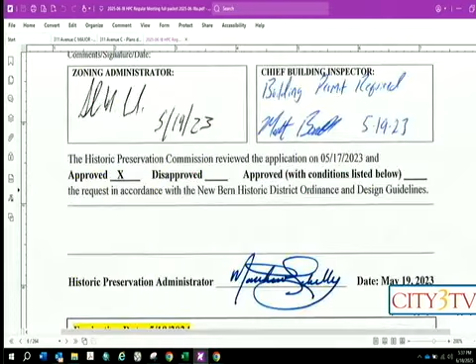We'll look over the application as filled out with regard to description, guidelines and materials, and then on the second page, the relevant check boxes and the signature and date of the applicant. So this is, I'm going to make this a little smaller, it seems to be going too fast.

This is in effect a reapproval of, or re-review of, a previously approved project that has not been changed in any way, other than the applicant's address and the signature on the bottom of the application.

So just to give you an idea what the COA entailed, there were no conditions at the time, and it was even extended for one year, but then after that one year it lapsed, and so now they're looking for reapproval. So the application at the time included this information here.

Showing similar historic district examples. The project is a new garage in the backyard of their property. We'll see that in a minute.

They provided some old Sanborn maps and delineated the work area for where this garage will go. There's currently a rusty shed in the corner of the property that they would like to remove in order to put in the garage. The site is at the corner of Avenue A and North Craven Street, with the driveway coming off North Craven Street.

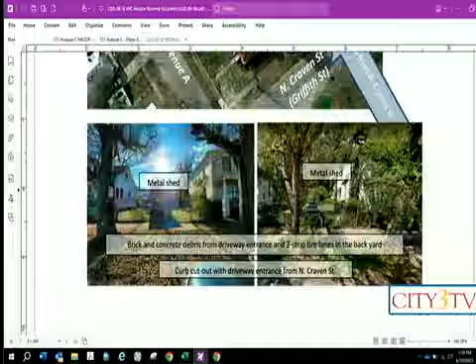So they have some photographs of the site here on the left, where you can see, especially in the winter, the metal shed, and in the summer with some of the leaves and stuff on the trees. But they're also pointing out the two strip tire lanes in the backyard, and a curb cut's already there.

So here they finally show the site and the proposed garage location in the blue dashed line here. And the white dashed line is the same as from before, delineating their backyard. In this case, Craven Street's on the top right, and Avenue A is the lower right.

So here's the beginning of the drawings. It shows in the upper right the front elevation of the garage, two doors, two lights, and a window for the attic space there. And then on the left side, it's a blank wall.

I'm sorry, I guess that's the right side. And then the back wall has also another window in the attic, and then the southeast side facing the house has the doorway on the right and two small windows on the left, and also another exterior light.

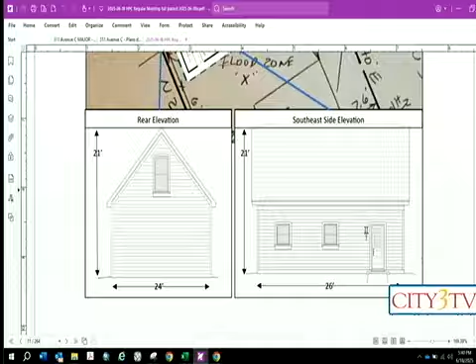They provided all the appropriate, or spelled out all the appropriate guidelines. We'll zoom through those.

Okay, so then we'd be ready for the zoning and inspections review. The zoning administrator indicated that a zoning permit would be required for the project, and it seems to meet the requirements of the land use ordinance.

The chief building inspector indicated that it will require a building permit. Building and floodplain permits are required. So then, when you're ready, I'm ready with the staff report.

Okay, is the applicant or their representative would like to comment?

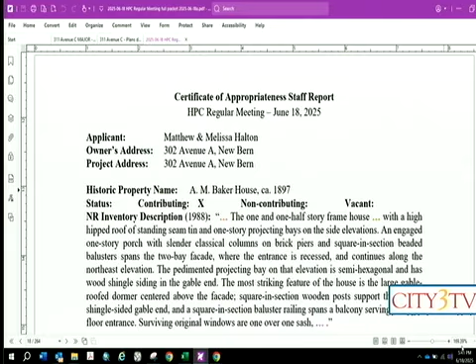Okay. Thank you. Thank you, sir.

Are there any proponents or opponents of the project that have standing who would like to present evidence? Seeing none. Others who can justify that they have relevant information and wish to speak to the project? Seeing none. We'll have your recommendations.

All right, so this is a staff report for the project at 302 Avenue A. The historic property name is the A.M. Baker House, and it was built around 1897. It is a contributing building in the historic district.

And the National Register inventory description from 1988, the relevant portions of it are: the one and a half story frame house with a high hipped roof of standing seam tin and one-story projecting bays on the side elevations. An engaged one-story porch with slender classical columns on brick piers and square in section beaded balusters spans the two-bay facade where the entrance is recessed and continues along the northeast elevation.

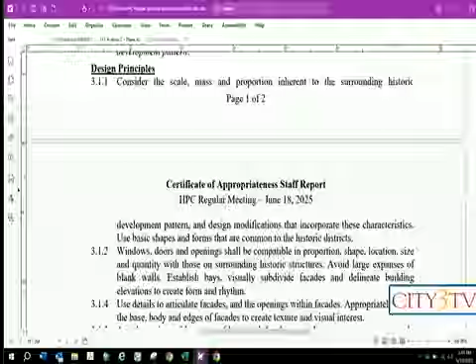So we submit the following historic district guidelines as appropriate to this application: for utilities, 2.3.1, 2, and 3; for fences and garden walls, 2.5.6; for accessory structures, 2.6.1 and 2; for parking, 2.7.1 and 2; for design principles, 3.1.1, 2, 4, and 5; for walls, trim, and ornamentation, 4.2.4 and 5; for windows, doors, and openings, 4.3.2; for paint, 5.4.2, 3, and 4; and for contemporary materials, 5.5.6.

Statements of reason based on the information contained in the application, in staff's judgment, are: 1, the structure is a contributing resource in the tight weave development pattern; 2, the project is an accessory structure within the secondary and tertiary AVCs; 3, the proposed design components and materials meet the requirements of the guidelines; 4, the zoning administrator and the chief building official have reviewed this project and commented accordingly; and 5, the project is not incongruous with the guidelines.

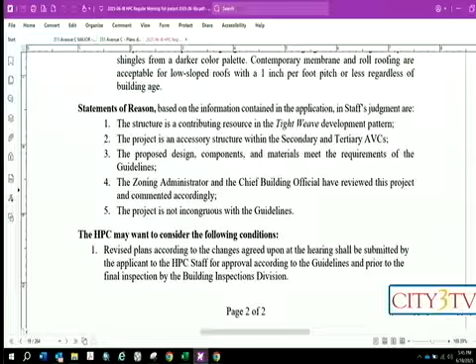The HPC may want to consider the following conditions. The only one I have listed here: revised plans according to the changes agreed upon at the hearing shall be submitted by the applicant to the HPC staff for approval according to the guidelines and prior to the final inspection by the Building Inspections Division. And that's our staff report.

Okay, thank you. Discussion, questions? We've approved this before because it certainly meets, it's certainly consistent with other garage types that we've approved in the past. As far as I know, there are no planning or zoning ordinance changes or guideline changes that conflict with what we approved before. It certainly meets guidelines 2.6.1 and 2.6.2 concerning secondary structures or accessory structures being secondary to the primary structures.

So I think this certainly still meets the guidelines. I'd agree, and I had a quick question for Matthew. We talked about this in design review, but thank you for adding those notes. I think that came out of our discussion. But for the record, other than those notes, are there any changes of substance to your application as it was reviewed before? No, there were none. Thank you.

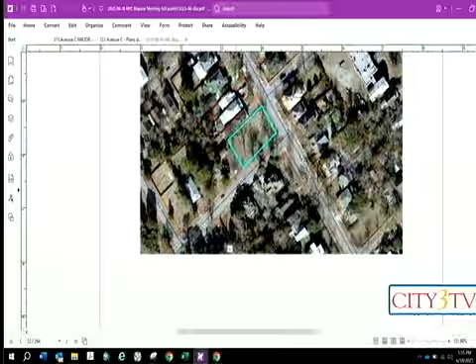And if you have any questions about the other - I'm sorry, there is more context, sorry to belabor this - but B Street is also part of the context for this project. Immediately behind, there's essentially a vacant, almost vacant lot with basically an accessory structure in the back. Then the next one is a house on a somewhat wider lot, as is the other two on that same block. The next house, you can see here in plan view, is quite a bit farther apart. Those, however, are not in the historic district. The historic district boundary is right here, after the edge of the vacant lot.

Then on the other side of B Street, already mentioned the one on the corner. Then the next few going up the street are somewhat smaller lots and smaller houses, somewhat closer together and closer to the street in this particular case. So, all right, next we can then see some of that more close up if we need to.

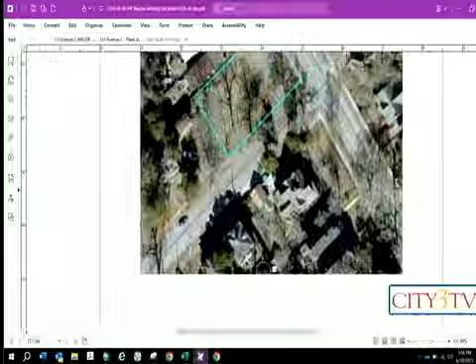So some of the existing photographs, at least from 2012, is what Street View had available for us, and it hasn't changed much. We have basically a large vacant lot with a couple of trees, some larger and some smaller.

As we move down National Avenue, you have a better idea of what some of these plants look like, but also the proximity to the neighbor. Back along the other side, you can see the neighbor's house and broadside in the back.

And the streetscape area there, and then if you go to the back corner, the southwest corner of the property, looking back across the property here. This tree, by the way, has since been removed recently by the city. It's no longer there.

Now moving up north on National Avenue, the neighbors' houses are shown here for context. You can see in the aerial view they were set quite a ways back from the sidewalk, and you can see that here even more so.

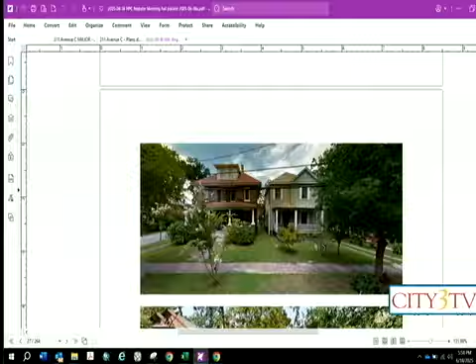So then across the street on National Avenue, these houses give you an idea of what those houses are like. Then as you cross Avenue B, continuing south on National Avenue, these are the houses directly across the street from the property, these two.

Plus then the ones on National Avenue, south of the property, but on the west side. This is the house on the corner back in 2012, no longer looking like that today. And then the two other houses to the south of that. So those give you some ideas of the context.

This is along National Avenue. Now this is going up B Street on the south side. That is the house on the corner with its garage, which happens to be pushed up right against the sidewalk. And then the next two houses up that same side. These are the other two.

These two are not in the historic district. And then across the street from those two on B Street are the other two houses on the block, on the same side as the subject property. And then finally, this is a view of the partially vacant lot with the accessory building in the back, and the subject property on the right.

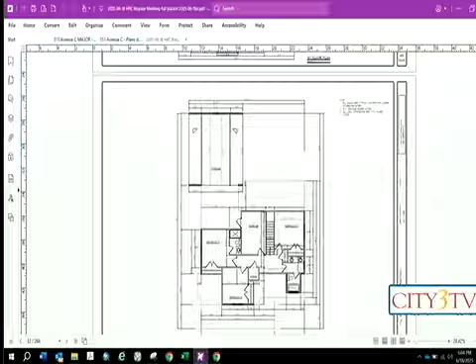Second floor, not much here. We'll notice that a lot of this is handled with dormers and sloping roofs. Probably not talking much about that.

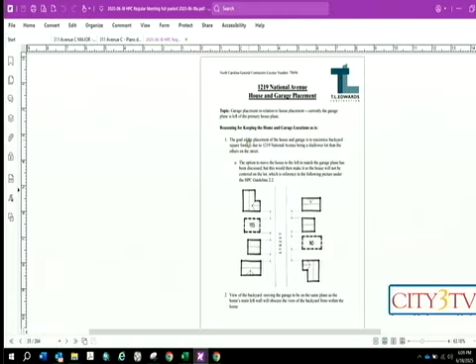Now, at the design review meeting, you asked the applicants to prepare something about trying to allow them to have the garage located where they had proposed in that meeting. So they provided this document here. I have to go over it with you because no one has had a chance to look at it since it arrived this morning or late in the morning today. So I'm going to go over this.

So the topic is garage placement in relation to house placement. Currently, the garage plane is left of the primary house plane when you look at it from the front. Reasoning for keeping the home and garage location as is: the goal of the placement of the house and garage is to maximize backyard square footage, due to 1219 National Avenue being a shallower lot than the others on the street.

Bullet 1: the option to move the house to the left to match the garage plane has been discussed, but this would then make it so the house will not be centered on the lot, which is referenced in the following picture under the HPC Guideline 2.2.

I have included the email that I replied to them with regard to this presentation. So we'll just go over this first and then go over my email reply.

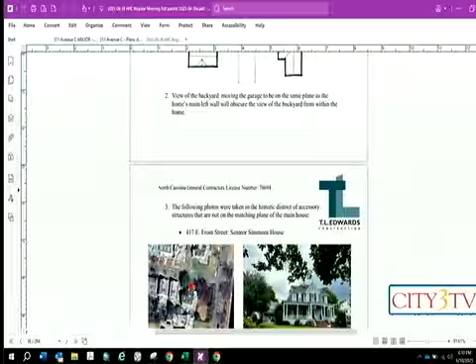View of the backyard: moving the garage to be on the same plane as the home's main left wall will obscure the view of the backyard from within the home. Their living room actually has windows looking out onto that back porch on the south side, very close to the back corner of the garage. If we want to look at the plan, we can look at that later.

The following photos were taken in the historic district of accessory structures that are not on the matching plane of the main house. I think they misunderstood that we required it to be on plane with it, but they've shown various homes that are not indeed on plane with the face of the building, but set back, and of course we know that's okay.

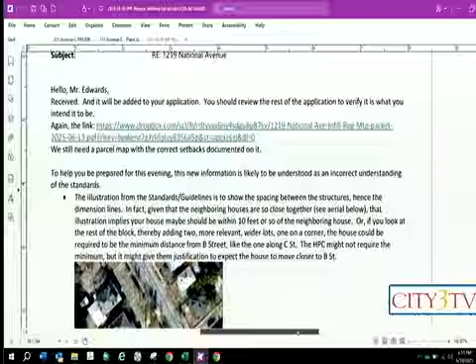So for my reply, I indicated—I should make this bigger now—the first bullet here: the illustration from the standards and guidelines is to show the spacing between the structures, hence the dimension lines.

In fact, given that the neighboring houses are so close together, see the aerial view below, that illustration implies your house should be within 10 feet or so of the neighboring house. Or if you look at the rest of the block, thereby adding two more relevant wider lots, one on a corner, the house could be required to be the minimum distance from B Street, like the one along C Street. The HPC might not require the minimum, but it might give them justification to expect the house to move close to B Street.

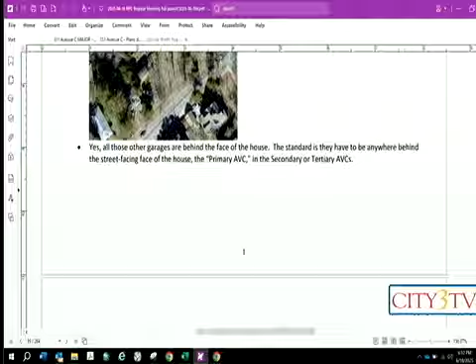And then the second bullet was regarding the other photos that they provided. Yes, all those other garages are behind the face of the house. The standard is they have to be anywhere behind the street-facing face of the house, the primary AVC, or in the secondary or tertiary AVCs.

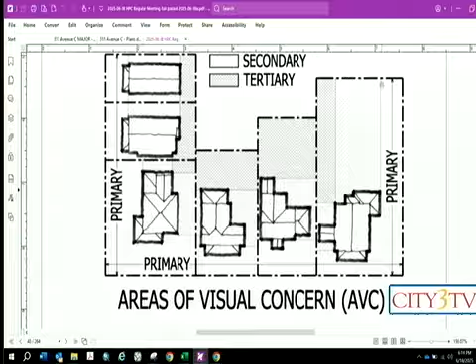So, for example, on this lower left property, the section inside the primary is actually the open front porch, supposedly. Same with this one on this corner here—the one facing down towards the bottom is an open front porch, whereas apparently the illustration here indicates an addition which has an enclosed space on this side, and therefore the primary is extended from the face of that wall. Or at least that's the way we all understand it. So there are options to address when we want to address that.

Before you move on, Matt, can you go back to your first bullet? What do you mean, back to what? Your first bullet on your response. This one here? Mm-hmm. Yes.

Okay. All right, moving on.

They've also subsequently provided, since the design review meeting, a landscape plan, so hopefully you've had a chance to review these. I see they're essentially planting around the building here. I pointed out that the air conditioning cannot be along the B Street facade of the building, so I'm thinking they may have an alternate in mind for that.

All right, so you probably remember from the meeting, they also provided a series of slides on the materials for the project, and they updated those according to some of the comments that were made.

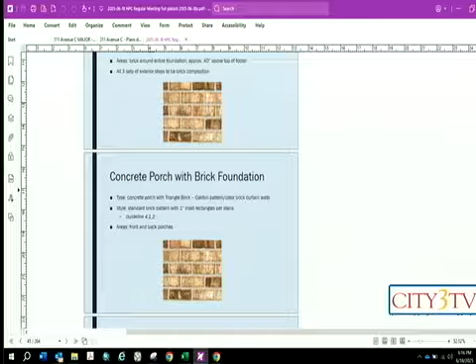So, for example, here we have brick veneer and steps, and then the concrete porch with a brick foundation, the siding—and in this case they've indicated the style is 7 1/4 inch boards with a 6 inch reveal and a smooth finish.

The boxing and trim is also Hardie board, smooth finish throughout, and we're talking about the areas of the rakes, eaves, beams, fascia, corner, and window and door trim. Trim dimensions are referenced in the plans.

Porch ceilings are standard pine bead board, for both the front and back porch ceilings.

The handrails are treated pine, painted white. Pickets are to be centered on the handrail with no more than 3 inch distance between each picket, which is guideline 4.4, and that's for the front and back porch.

The columns are brick and AZEK, with dimensions given in the plans for the front porch columns. The brick is the same as the other brick throughout the house, and the AZEK is to be white.

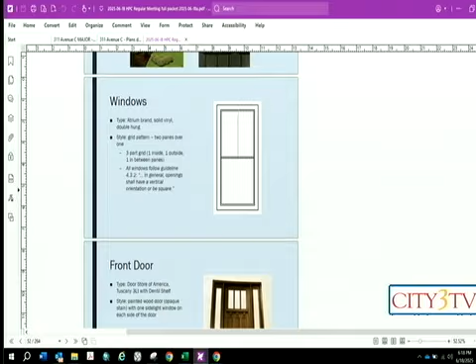For the windows, they are solid vinyl double hung, 2 panes over 1, and they have the 3-part grid with 1 inside, 1 outside, and 1 between the panes.

For the front door, primarily it'll be a painted wood door with opaque stain, with 1 sidelight window on each side of the door.

The back door is a fiberglass door, paint grade, and it's a full glass door with a transom window above it.

The door to the breezeway is also a fiberglass door, full glass, and painted.

The garage doors are 2 painted aluminum insulated doors, carriage house style, and the panel style shown is not necessarily indicative of the final selection. It's what they could probably Photoshop in there.

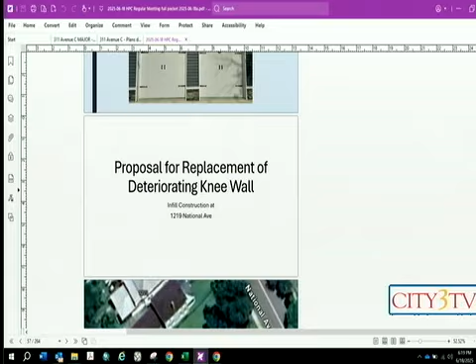They also provided a proposal for the replacement of the knee wall along the property line with their neighbor to the north. The knee wall runs the length of the property between the 2 properties, and these are some photos that we saw the last time.

It's not a retaining wall, has no structural significance or footers. It's unstable and deteriorating, interferes with placement of fence and landscaping, detracts from the appearance of the property, and grading of the property may impact its integrity. So they're proposing for fencing.

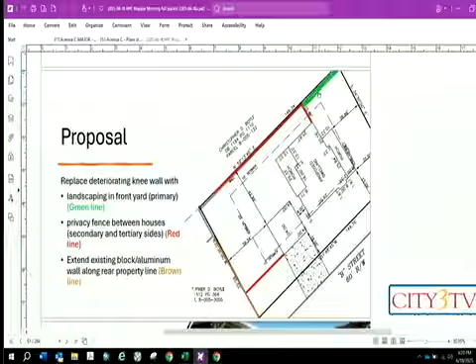I'm not going to make this bigger, the lettering has gotten smaller, and we need to see the colors here. The lines in green up in the upper left and upper right are a line of landscaping that they're proposing.

Then at the front face of the house, they will be coming out with a privacy fence across to the boundary, and then back to an existing masonry wall that's back there, coming close to the corner of the property.

Going around the corner of the property, that masonry wall will remain. Then starting at the end of that one, they're looking to extend the existing block and aluminum wall along the rear property line - that's this brown line - out to the property line.

And then at the point where it reaches the face of the garage, they would like to restart with the wood privacy fence. They're also planning on probably putting some kind of fenced gate across the breezeway, with the intent to provide an enclosure for a dog.

Before we move off fences, can we talk about the height of all those? They didn't indicate... oh wait, here we go. Good segue - so the proposed wood fence is to be 5 foot tall.

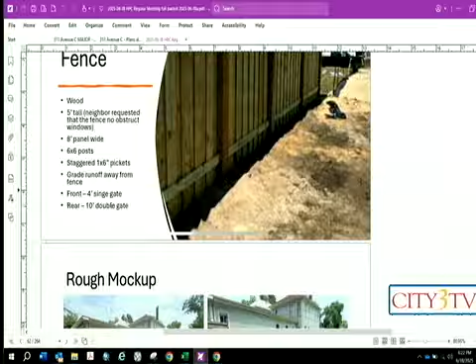So they provide a bit of a mock-up here for that. Along the neighbor's property, that 5-foot wooden fence would be along here like that. And because they didn't like that angle, I guess, they also represented it here. You can see the landscaping on the right side of that as well.

You also see that little knee wall that they were talking about removing, also in the upper left corner here. I can barely see it, but...

And then you can notice the neighbor has that masonry wall I was talking about, which has gaps between the piers that are infilled with some aluminum fencing. They would like to - that's the one I suppose they or their neighbor, depending on whose property it is, and maybe the applicant can talk about that. That's the one - I don't see any height on that one.

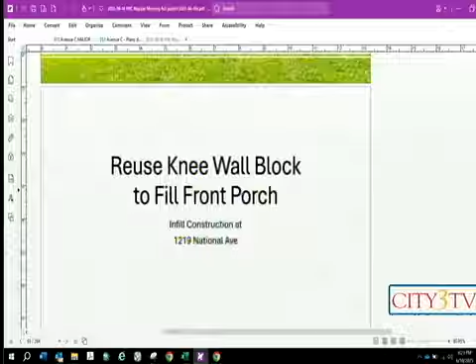Right, they would like to continue this one. So that would be one we should get more information about, especially with regard to whose property it is on, and whether or not the neighbor agrees to that if it's on their property.

So they would like to reuse the knee wall, the dilapidated knee wall blocks, to fill in under the front porch.

They actually provided some very nice data on wood porches and concrete porches. Apparently there's 21% in the Riverside area in this study that are concrete.

Existing historic Riverside district homes have 2 variations of concrete porches shown here: slab without trim, with a number of photographs, and concrete with brick trim.

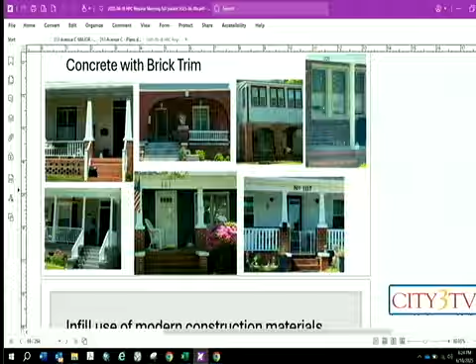So then they're making the case for reusing the block for fill underneath the porch, and additional considerations for that. Then some of the guidelines reiterated here, including some of the narrative information.

All right, so now we'll move to the zoning and inspections review for the project at 211 Avenue C. The zoning administrator has indicated that it seems to meet the requirements of the land use ordinance, just needs a zoning permit. The chief building inspector has indicated that it will require a building permit, and then we're ready with our staff report.

Okay, would the applicant like to add anything to that? Not at this time. Well, the only thing I want to mention, I know there's some discrepancy in the offset of the garage, and I'm not sure what your decision is going to be on that, but I do have some remedies in mind after I hear what you guys will decide, the offset being on the main plane of the house.

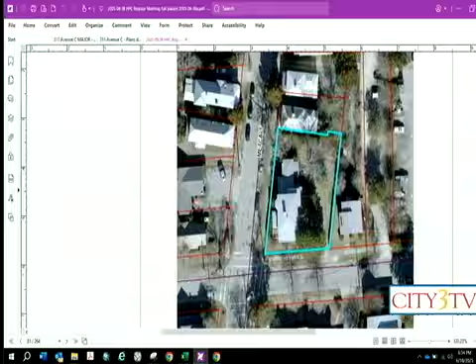So here we have, for example, you can see the space around the house is rather generous, especially compared to its neighbors. If we need reference to any of that information, we can come back to that. And that's a close-up of the actual immediate proximity and the site itself.

Also some reference and context photos of the actual structure from the corner. It's well known with the 2-story columns here on the front, and the overall appearance and style of the structure.

I also took this photograph here to point out this door does actually have shutters on the door. So I know we talked about that the last time.

Let me see. I can't see it there, darn.

So this is then, as we go around the side, the porte cochere here on the right, and the porch wraps around from the front to the side with its own secondary one-story roof over it on this side, and all the way around to the back, which you can't see in this photograph, is the back porch we're talking about for today.

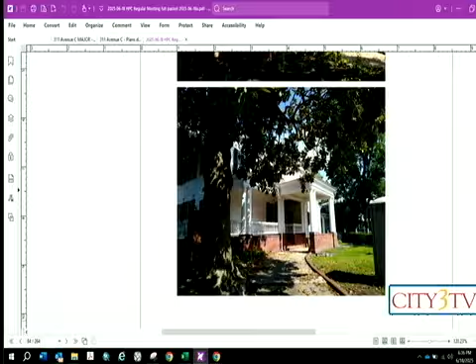This is another angle of that same view, and you can start to see the back porch here behind the porte cochere from the street. I noticed both of these, this window behind the column, had the shutters already closed, and this doorway also has shutters that are closed. Otherwise, every window has shutters.

Okay, so now we're going to see the drawings.

So this is a drawing of the front of the house, existing, and there are proposed to be no changes. This actually flattens everything out because the porte cochere, as we know, is actually pretty far back from the front facade.

Let's see what else. All right, here's a good one. We will hear later about something called louvered vents above the windows. They're talking about this up here in the frieze on the second floor. It's just something I want to point out now because it might be a question in somebody's mind later.

So this is the existing right elevation. We see on that side the wraparound side porch. We have a side porch on the right, that's the rear side porch, and then we have this side porch at the porte cochere, and currently there are two windows there, shown here.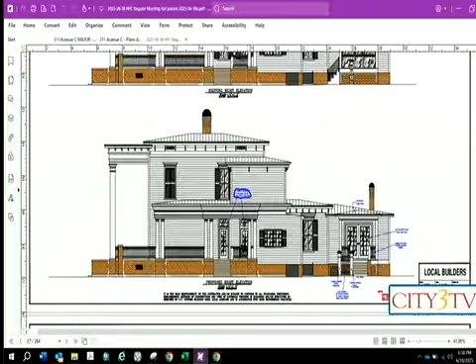So we'll compare that with this one here, for example. See that? All right.

Then on the back, this is the existing rear elevation, and they're just pointing to part of the fence here. We'll see that in plan view to explain that. One thing to note is this particular window here is to have its sill elevated, so we'll see that in a second.

There we go, let's go a little bit more. There we go. So there, the sill is elevated, the roof is elevated for the porch. The balusters here are shown for the new balusters for the rear porch. The side view of the steps for that porch, and also showing more of the fencing that's there.

Here's the existing side elevation that faces Metcalf Street, and we'll see that there's actually no changes to be done on this elevation.

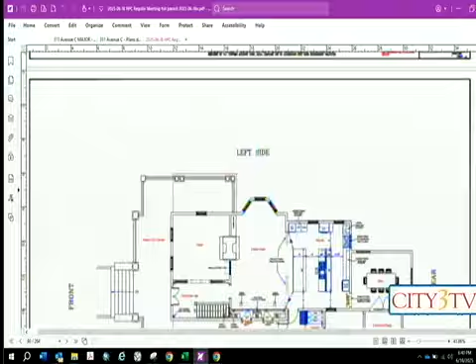So then here's our plan view for the first floor. On the left is the front of the house out along Pollock Street, and the top is Metcalf Street. So we have no changes on the front facade, and on the side here it shows the two windows that are to become two doors at the porch there.

And then on that elevation, the changes to the front, the enclosed porch becoming an open covered porch, and then the changes to the fencing here as well. They're relocating some of the pieces and extending, making a Z or S shape to the plan view of the fencing, whereas right now it just goes straight into the side of the porch.

And now we also see in plan view the steps for the porch and the walkway at the bottom of the porch. This becomes a gate here, which we saw, maybe you remember seeing that in the elevation. There's a gate here in the fence.

Also to note is the doors, the existing doors for the porch will be replaced by two doors that they're taking out of the inside of the house and turning into two swinging, essentially French doors, for the dining room.

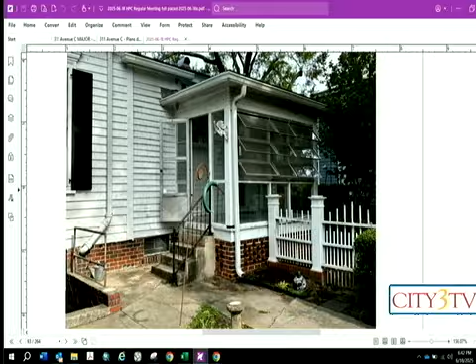There you go. You can see here the steps on the left instead of the front, instead of what will now be the front. The fence running into the side of the thing will be moved. So this section here gets shifted over to align with the corner, and then does a zigzag across here.

More of the same in a minute. Got another one, and the third one, which is actually just a close-up.

You can see especially in this case, there are some details in the woodwork around the top and the columns and the bottom of the porch.

These are the double doors to become the French doors.

For our zoning and inspections review, the zoning administrator has said that it seems to meet the requirements of the land use ordinance and a zoning permit is required. The chief building inspector says that it will require a building permit. Okay, and then we're ready with our staff report.

Okay. The owner or the representative care to comment? You're pointing at each other. Would either of you want to comment? No? You don't need to. No comment?

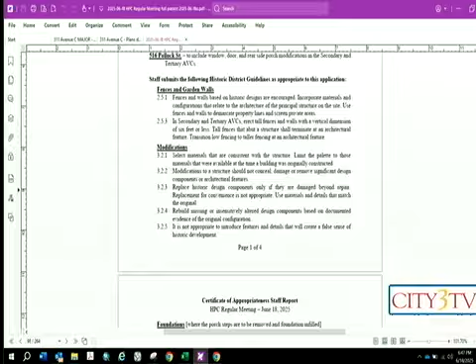For fences and garden walls, 2.5.1 and 3. For modifications, 3.2.1, 2, 3, 4, and 5. For foundations, 4.1.1, 2, and 3. For walls, trim, and ornamentation, 4.2.1. For windows, doors, and openings, 4.3.1, 3, and 4. For entrances, 4.4.1, 2, and 4. For roofs, 4.5.4.

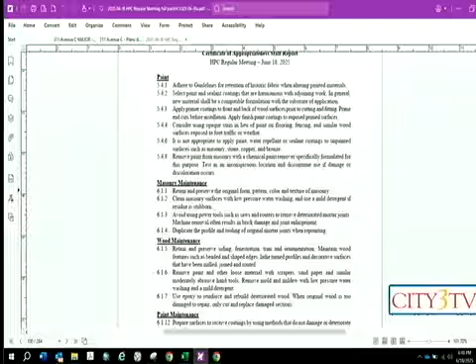For masonry, 5.1.1, 2, 3, 4, 5, and 6. For wood, 5.2.1. For paint, 5.4.1, 2, 3, 4, 6, and 8. For masonry maintenance, 6.1.1, 2, 3, and 4. For wood maintenance, 6.1.5, 6, and 7. For paint maintenance, 6.1.12, 6.1.13, and prevention of demolition by neglect, 6.2.2, 3, 4, and 5.

Statements are reasoned based on the information contained in the application, and staff's judgment are: 1, the structure is a contributing resource in the tight weave development pattern. 2, the project is replacements of windows with doors, closing one window, windowsill raising, conversion of the enclosed rear porch into an open porch, relocation of the porch steps, raising the porch roof, and fencing realignment construction, all in the secondary and tertiary AVCs. 3, the proposed design components and materials meet the requirements of the guidelines.

The zoning administrator and the chief building official have reviewed this project and commented accordingly. And the project is not incongruous with guidelines. The HPC may want to consider the following conditions: revised plans according to the changes agreed upon at the hearing shall be submitted by the applicant to HPC staff for approval according to the guidelines and prior to final inspection by the Building Inspections Division. That's the end of our staff report.

Okay, questions, discussion? It's a very careful, nice modification to bring some modern conveniences, but without changing really the appearance of the house. Just one question, when you say shorten the window, are you actually rebuilding that same window, or is it a new wood window? It's going to be that same window.

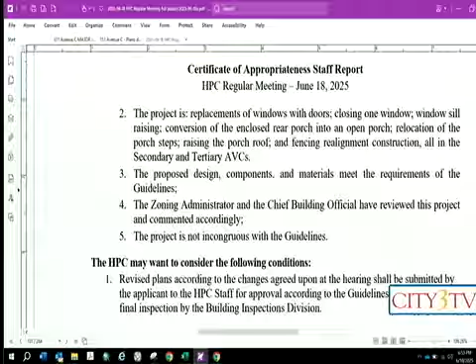Is there a second? Second. Okay, moved and seconded. Any discussion? All in favor, state aye. Aye. Opposed? Motion carries. Another motion for the issuance of the COA. So moved. Second. Moved and seconded, we issue a COA for the project. All in favor, state aye. Aye. Opposed? Hearing none, issue the COA. It's a good project, good job, very good.

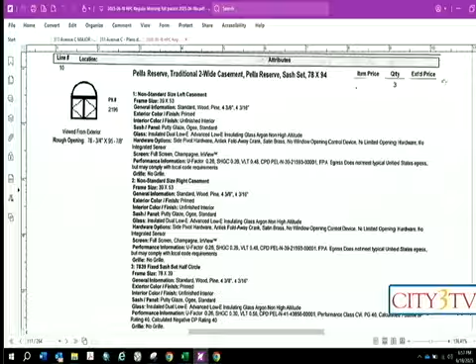Then again, next to the door, it's a single one - it's a movable casement. Number one is a casement, and number two is the half circle. Then the door itself is an in-swinging door. Oh, and I forgot to go over the materials on these.

So this one is standard wood, pine, primed. It talks about the glass, has no screening. That might be all we care about, but if you want to know more we'll come back to that. So I'm going to go back to the other ones to make sure you see that these windows are to be wood, in this case pine wood. And in the case of the half circle, it's also wood - right here it says wood. So that would probably be the same for the other ones. Here we have wood, wood, and wood.

Oh, and that's the half circle over the door. All right, so then we move on.

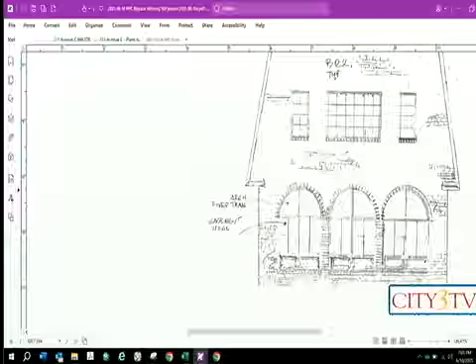But I guess for tonight's discussion, we're going to take off this sketch here. The second sketch appears to be correct. The one on the front, on the primary AVC. So does that apply to the cut sheet, which shows a divided two windows?

I believe it's the first cut sheet. Keep going. So it appears to me, given the dimensions on the rough opening, 78 by 95 and change, that's the large opening with two casements. Yeah, so I think that's correct. So there's really just one fixed and two casements. Correct, yeah, I think that's what he's doing. It's a big window.

Any other comments or questions? No, it maintains really the appearance of the house while improving the livability. Maintains the arches. Actually, it's better because it looks more minimal than having a bunch of members going through there. True, it's very well done. Okay, any other comments or questions? No.

Just a clarification so everyone is aware: on page 4-8, there's a reference that it's inappropriate to enclose screen porches on the primary AVC. We typically, if a porch has already been enclosed, which this one has, don't require it to be undone, and I think in this case the new enclosure is an improvement over what is already there. Thank you, I concur.

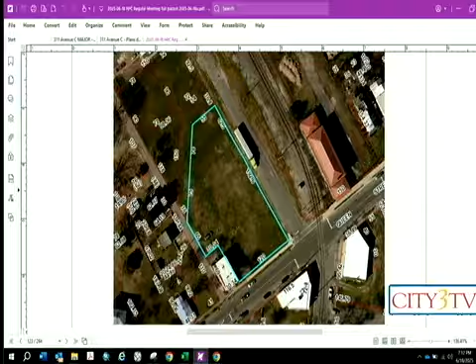So this is the context. We have the very large vacant lot that is across the tracks from the train depot and also along the side of Pasteur Street there, in addition to being on Queen Street. It also has a frontage along this public alley called Cool Street, and has a very strange corner cutoff at an angle due to some strange subdivision that happened in the past. I think railroad tracks went through it originally, but I've never been able to see tracks on maps anywhere. So anyway, it makes sense that it would be.

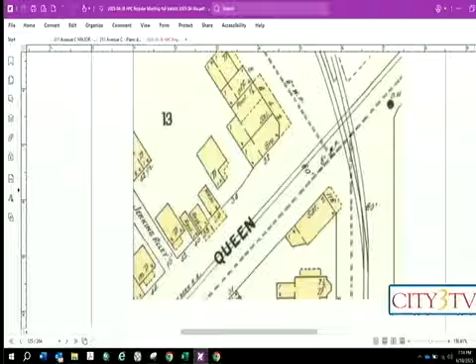Just thought it was interesting historic context, in addition to the fact that across Queen Street was also another saloon over here, and the number 2 represents how many stories. So this is a 2-story building with a 1-story addition on the back. This is a 1-story building, the grocery store, the 1-story saloon, but there's a 1.5-story pool hall, and the other buildings are all 1-story. So that was 1898.

1904 — I guess the saloon was doing better than the grocery store, so the saloon's now twice as big, and the grocery store has moved back from the corner.

But we still have that porch out front. Then we have another jewelry store, a restaurant, and a barber shop. And then that thing is still vacant. And the dwellings are still there. Two of the restaurants are here, but the other one is gone, along with the dwelling. And now the saloon over here has turned into a grocery store.

Then in 1908, giving a little more context here, the train station has actually added this very large train shed portion to it. The passenger station is only this small wooden one. The brick one we have today has not been built yet.

And the corner of this lot was a confectionery and a restaurant. Here, let me make this bigger. A confectionery, a restaurant, vacant, a jewelry shop, a dwelling, and a tailor. And then there was a boarding house a little farther back, a dwelling, and some ruins of a fire.

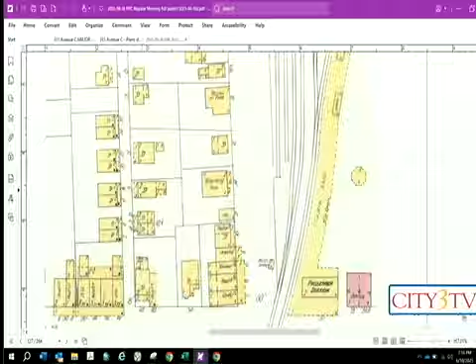Meanwhile, along Queen Street, there's now a somewhat elaborate dwelling next to that building, and then where the Rhone Hotel is, a dwelling and a restaurant attached to its side. Farther down, we have a grocery store, something else, a restaurant, dry goods, a bunch of stores all along Queen Street. This is all because the train station was where people arrived into town.

So there we go, that was the arrangement I was looking for. And in fact, there was a police station in the middle of the street next to the tracks.

So then by 1913, the now brick train station has been built with overhangs for people to hang out and wait for their train. And then the property itself, I have another enlargement here: a confectionery, a restaurant, a vacant restaurant, a pressing club, which I think is for ironing clothes, and a shoe shining parlor. Meanwhile, that elaborate house has now added its own restaurant in its front yard.

And then there's the 1922 fire, which wiped out everything except the train station itself. So rebuilding in 1924, just two years later, we see a very large structure—red means it's made of brick—with many, many shops all along here. Every S represents a shop. They have the cleaning and pressing here, and a packing room in the back. And the Rhone Hotel has been constructed.

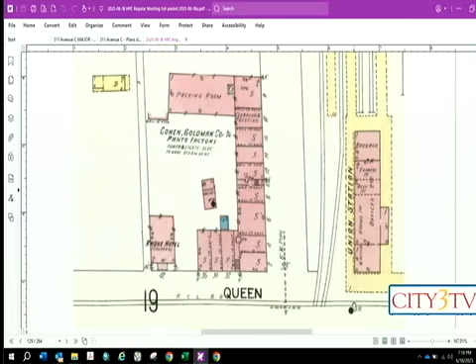1958, the last one, sorry—it's a revision on the 1931 map. And so this is that brick building which has now been modified to become the Frederick Tailoring Company clothing manufacturing facility. They've filled in the entire U shape with a concrete block structure. I don't know if some people know, but this was for sewing pants, manufacturing pants for this Frederick Tailoring Company out of New York City.

So that gives an idea of what's happened on this site over the years. That was 1958, and it was then torn down, I think, in the 70s or 80s. And now, ever since then, we have a blank site.

So we can look at the various angles and views of this site. Let me make this somewhat bigger. The way it is today, as we look down Cool Street, you see our memorial sign for the Ebenezer Presbyterian Church here, which was way at the back of the property.

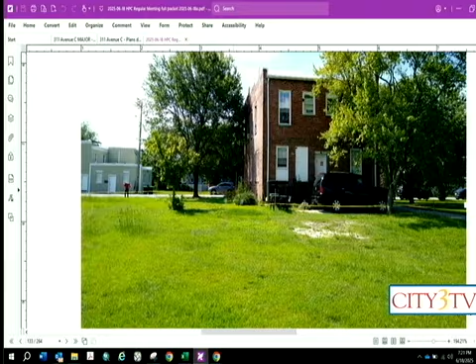Then going further down Cool Street and looking back towards the rest of the property. And now crossing across the property, seeing the relationship of the Rhone Hotel to the space over here on the left and also on the right, and the location of this large tree.

Back to that angle, I don't know why I did that, and then once you get to Pasteur Street, looking back up Pasteur Street to the other houses that become the reference for the setback, which I have to zoom into quite a bit. There's the, you guys call them Seven Sisters? Six Sisters.

But there's another house in front before that. It's around this location, either where this house is or in the grass here where the Ebenezer Church was. And you can also see that we have a grass strip here at this end of the property, or at this end of the street.

Starting right here at the bottom of this photo, it's been paved and there's no curb. This was taken last week or Monday or something. So let's see what else we got. Looking back from that spot back to the corner again, back to the point of beginning. So if you have any questions about that.

All right, well, I believe we can start with the drawings. This one was just submitted today to include dimensions between the building and the property lines, but it still includes the yet to be updated parcel plot plan. So that's a similar story to the one on National Avenue. The surveyor couldn't get to updating that.

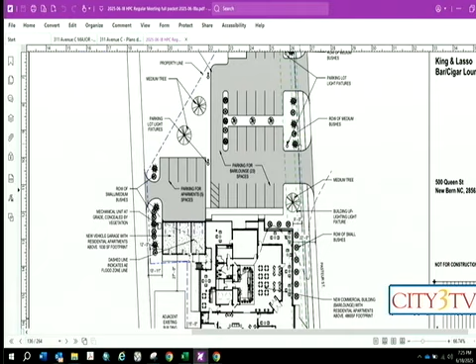And then the only other thing left here is the distance from the face of this garage and residential building to the property line here is 5 foot 4 inches, so that would be within the 5 foot side yard setback requirement. Let's see, so I think that's it for the setbacks.

They removed the parking along Queen Street that they were proposing to chop in there, where the grass strip is currently today. On this side, I think they're showing that paved area of Pasteur Street to become green grass, but we can check that with them.

Then the parking lot is shown now here with some parking lot lighting in these 3, 1, 2, 3, 4 locations. The parking for the commercial use is separated from the parking for the apartments, and there is actually a pad back here which must be for a dumpster, which would require an enclosure. So we'll be looking for some drawings or designs for that enclosure. They have also added to the package today the cut sheets for the parking light fixtures, so we'll see that in a minute. That's some of the new stuff since the last meeting.

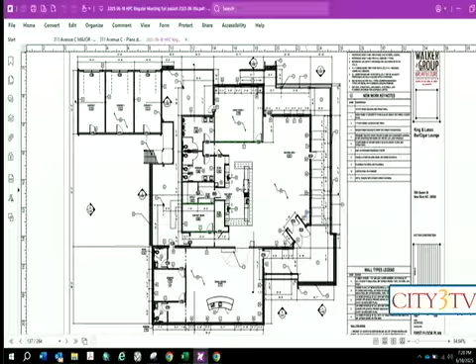With the essentially wraparound porch here on these 3 sides. And then the garage in the back upper left corner is separated from the rest of the building but connected with a breezeway. Above the breezeway roof essentially becomes the walkway into an entrance into the residential units. So move to that.

Here we have on the upper left one residential unit with its entrance, and the stairways provide access to this, essentially the roof of the breezeway, which becomes the entrance for 2 units - this being the entrance for this half of the building unit, and the other half with its entrance there. This is actually the roof of the portion of the building below - just a 1-story portion, whereas the rest of the project is 2 stories.

Here you can also see the plan view of the pergola or trellis structure over the porches, over the wraparound porch area. And that's the roof - we have flat roofs on these sections here, and this is a sloping roof with metal.

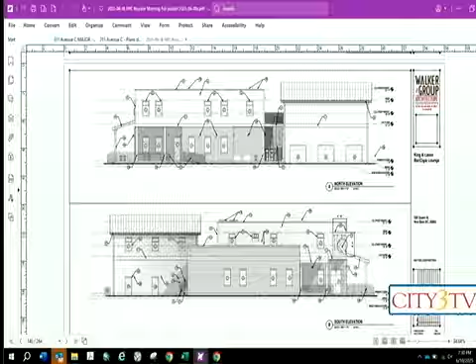These are the back and the front. So the front - this is the elevation facing Queen Street at the bottom. Here you can see our wraparound porch and entranceway with handrails, and there are also lights shown on here.

There are lights shown here and over here. The windows are all vertical throughout the entire facade here. This shows roofing, not trellis work. I'm not sure what that is then.

We'll get that clarified. On the back we have our 3 garage doors with the apartment above, the breezeway between, the second floor windows up here with siding. The upper floor has the Hardie board siding, the concrete siding, and the first floor is all brick. We'll see this all in the renderings in a minute. And then the handrails for the porch and the ramps for the ramp here on the back side.

Let's go to the next page. So here this is the Pasteur Street side. This entire side underneath here is a porch-like situation, and upper floor is the Hardie board with all the windows for the apartments, or dwellings I should say.

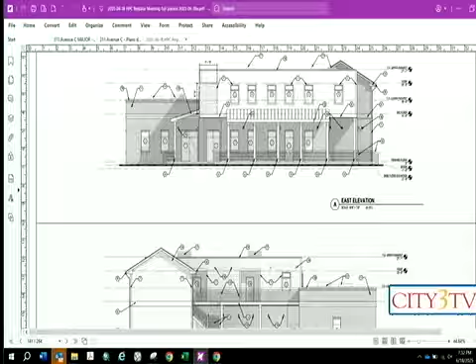They could be condos. We have to show the doorways for both the main entrance and the side entrance here, that other room on the side there. And then the other side facing Cool Street and the Rhone Hotel - this wall is facing the Rhone Hotel with one window here. The breezeway then connects back to the garage and apartment, which then faces Cool Street.

You can see the stairway going up, the handrails at the top, the entrance, the recessed entrances. They've also depicted some of the mechanical units on the roof.

They provided a section through the building, through both buildings, in several directions. The main thing is to see the roof here, this heavy black line in both the 2-story and 1-story, and then there's a parapet all the way around both of those roofs.

Several building sections showing the brick veneer and the Hardie board siding, structural and insulation details, details about the handrails for the steps and for the breezeway roof and this handrail section.

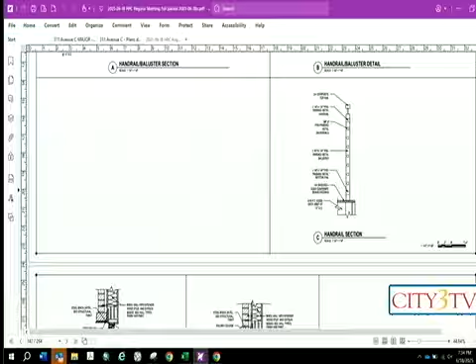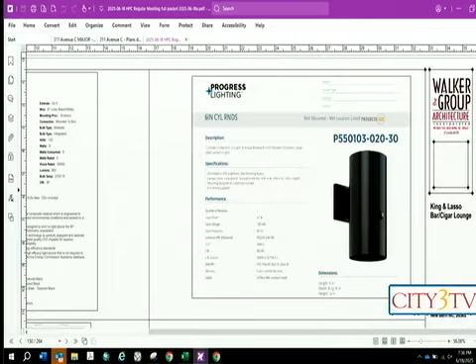They've also provided some details of the light fixtures. Some are like this, some are recessed. And then for the parking lot, the light fixtures are like this.

This came in today, so this is new for you. What kind of a bulb is it? I don't know.

Yeah, do you understand my question? Oh, I do have it. Would you come up if you want to add? So were you sworn in at the beginning? You were, Jim? Okay.

Mr. Chair, staff needs to go over the zoning and inspections report before we hear from the applicant. Oh, I'm sorry, I forgot that. Okay, just give us a minute. Too soon. There we go. Sorry.

All right, so the zoning and inspections report. This is in the C4 zoning district with the River Station mixed-use overlay, in addition to being in the historic district. And there's a certain category in the overlay that is for what they call storefronts, which allow commercial use with residential above.

So, Mr. Chair, members of the commission, this is an important piece. Normally, when staff reviews the zoning and inspections report, you'll see a comment that a permit is required, especially from the zoning administrator. This zoning and inspections report is quite a bit different. Normally, before you see things such as single-family residential construction, which is permitted by right in just about every zoning district in New Bern. There are uses that are permitted by right, and there are other uses that are permitted by special use permit. The special use permit process requires a hearing, much like this one, different criteria, but there are quasi-judicial hearings where there's findings of fact, conclusions of law, and then the permit is issued if they've satisfied the criteria. In this circumstance, because our zoning administrator has offered evidence that a special use permit is required but

that has not yet been obtained, as we sit here this moment, the applicant does not have a legal right to use the property in the way that is being intended. Not to say that they may not be able to satisfy the criteria, that's entirely possible, but the special use permit process has not commenced as I understand it. So based on this note from the zoning administrator, the applicant does not have the entitlement necessary to use the property, and therefore a review of any design criteria is a bit premature.

So I'm going to interpret what you said then. We might approve this building. Obviously, there's a condition to be met that it meets the zoning requirements. But I'm struggling for what role we're playing here. And that setback requirements that were not met also, it appeared.

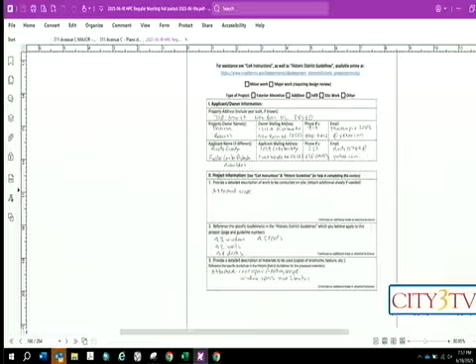We were thinking about going to that. We still might. We have a wedding in Philadelphia in a couple of weeks. It's up one week and back, and then up again. It's too long to bridge, too short to have two different trips.

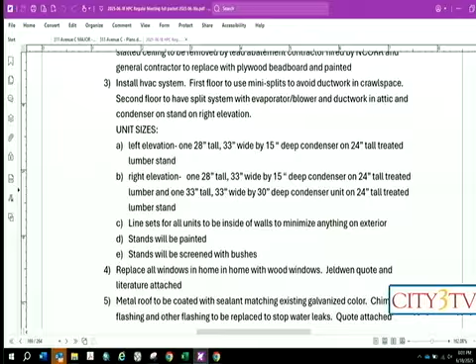Number four, replace all the windows in the home with wood windows. The Jeldwen quote and literature is attached. And number five, the metal roof is to be coated with sealant matching the existing galvanized color. The chimney flashing and other flashing is to be replaced to stop the water leaks, and there's a quote attached for that to give you some of the details.

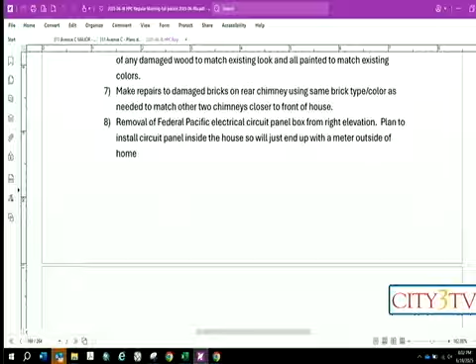Number six, the soffit, fascia, front porch ceiling, and any other exterior wood is to be scraped by a lead abatement contractor hired by NCORR. Repairs will be made by the general contractor of any damaged wood to match the existing look and all painted to match existing colors. Number seven, to make repairs to the damaged bricks on the rear chimney using the same brick type and color as needed to match the other two chimneys closer to the front of the house. And number eight, removal of the Federal Pacific electrical circuit panel box from the right elevation, with the plan to install the circuit panel inside the house, so we'll just end up with a meter outside of the home.

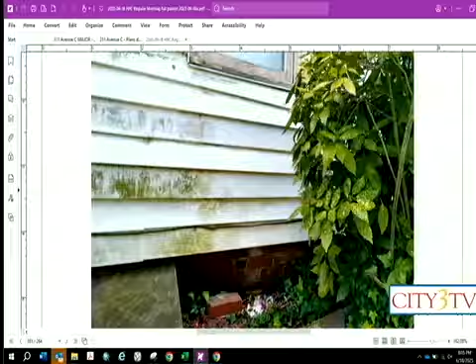So now this is from our site visit, staff's photographs from the site visit. This shows some of those - shows some of the foundation collapsing here, and I guess that's the same thing. All right, now you can see how the corner's separating. There you see the actual studs from the outside.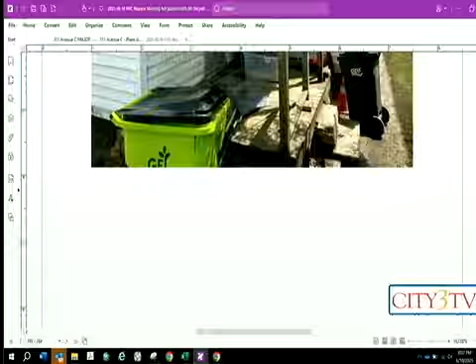Then we have some details from the windows to show how serious the deterioration is, not just here in the corner, but all the way across this windowsill.

So could you come forward, because there's about 30 pages here that I think we don't need, and so I'm hoping you'll help me identify it. I already eliminated the first 3 or so. I think you eliminate all of them.

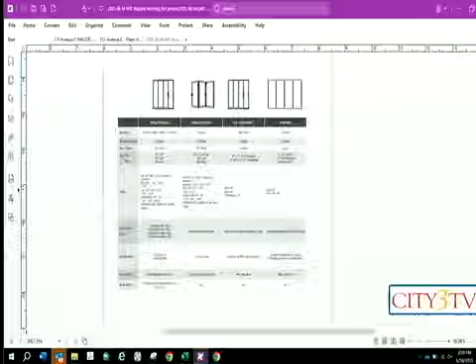Okay, yes, but so going just back to the wood windows, it described it as wood clad somewhere. That's all in that literature, which we should probably not even have - I asked them to send me some information, and that's what they said, and I've been unable to get any more. They are not clad windows, it's all solid wood. Okay, which is in the spec sheet for your work. Yeah, it's all natural pine, SDL. Good, thank you, that answers that.

And so this then gets to the window order forms, and you can see it does include the 12 lights on the top and 12 over 1, so that's also good.

The other ones are all the same as the existing. I remember that from the photograph of the back of the house, right? Those there's 6 pane windows. Yeah, there's 13, and there'd be 12 on top. Right. There's 17 windows in total, and there's apparently 2 that have the grills in both sashes. All right.

Okay, let's see what else. Now this is the information about the roof coating, and the size of the area for that is the entire roof. In this case, the SHPO has provided a letter about the project, primarily - so I should have highlighted the sections that are relevant.

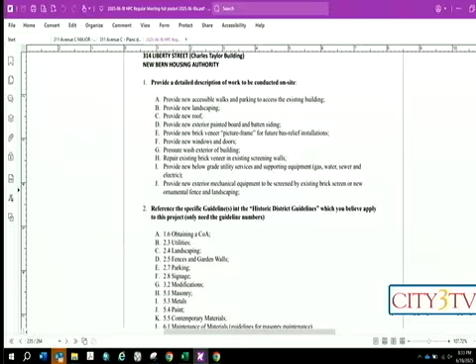The detailed description here indicates A through J: provide new accessible walks and parking, provide new landscaping, new roof, new exterior painted board and batten siding, new brick veneer picture frame for future bas-relief installations, new windows and doors, pressure wash the exterior of the building, repair existing brick veneer and existing screening walls, provide new below-grade utility services and supporting equipment, and provide new exterior mechanical equipment to be screened by existing brick screen or new ornamental fence and landscaping. They reference the guidelines and materials.

Here's our reference context aerial. The subject area is shown in the blue outline. They actually own all the property to the right and lower right. The lines of the project do not align with the property lines.

So then they have a private driveway along this top edge, separating them, and a chain link fence separating them from the new construction on Liberty Street we approved a couple of years ago, and also the existing buildings that have been here for a long time. To the right and lower right is the edge of Trent Court and the housing units there. Across the street is a series of mostly vacant lots, except for one house directly across the street from the site.

The historic district boundary goes down the middle of the street, essentially, so that house on the other side is not in the historic district, but everything else is. That's an up-close and personal view if we need it.

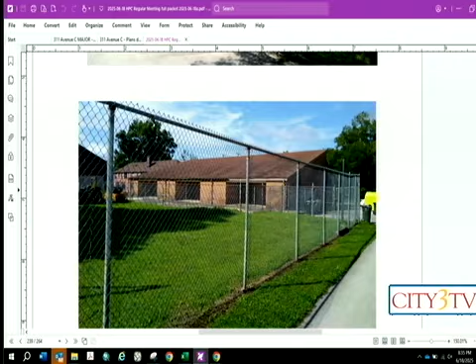Now this is from the back, looking towards the building. This area here in the grass is to become parking, you'll see in the plans. There's a much wider view here, and you can see the walkway for the residential units on the left and the private driveway on the right.

Then a view through to the back side, the paved area behind the building. Then from the street again, zipping all the way around back to the street, looking at the space between the building and the adjacent housing. This is primarily occupied by a large brick wall enclosing some outdoor space on that side of the building. As you get closer, that wall continues back, and the new fence for the generator will continue past the end of this brick wall.

So here is Stogner's presentation that we've seen a couple times now. You can see already, the first thing is to remove the chain link and provide the dumpster enclosure, which we'll see a drawing of. Also to provide new siding and wash the exterior of the building.

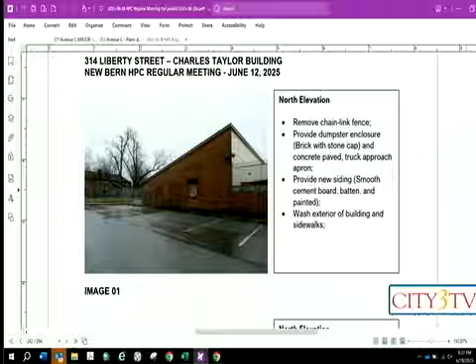Pretty much more of the same here, with providing a new ornamental gate for access to the courtyard in between, and some new exterior lighting, wall packs. Then more of the same again, now an accessible parking space with curb ramp and signage, and improved landscaping at the building foundation.

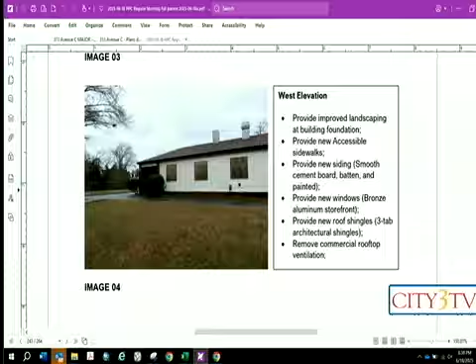Again, improved landscaping. I'll point out the new things: new windows, bronze aluminum storefront, new roof shingles, and removing commercial rooftop ventilation pieces there.

Restore the soffit, new gutter and downspout which will be aluminum, and new siding with smooth cement board, batten, and painted.

Infill existing window at the front. Provide new lighting, wall packs, already said that. Replace warped and rotten fascia and wrap the fascia with pre-finished metal.

New insulated metal entry door. Remove artificial surfacing, that must be the ground, outdoor ground surface. Restore peekaboo wall.

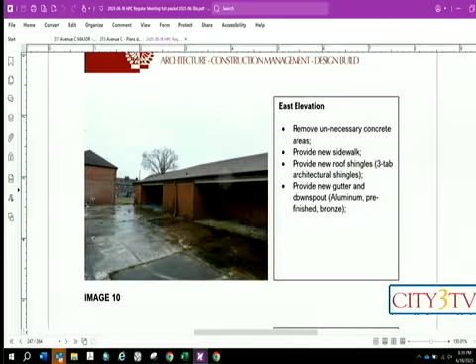Nothing new there. Remove remainder of overgrowth from utility lines. Remove unnecessary concrete areas. Provide new sidewalk.

Provide new door, insulated metal, painted. Restore soffit. Infill existing door opening with new wood framing and new siding. I think we talked about that at the design review meeting.

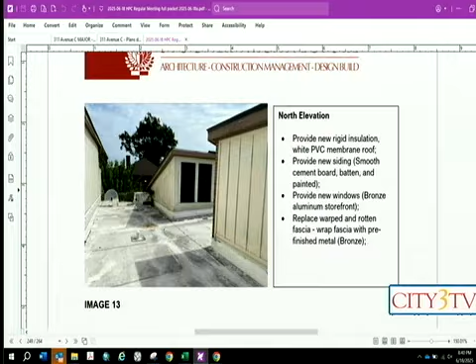Provide new rigid insulation, white PVC membrane roof. Replace warped and rotten fascia. Have that too.

Remove commercial rooftop ventilation, relocate through vents to secondary area of visual concern. Provide new roof shingles, 3-tab architectural shingles.

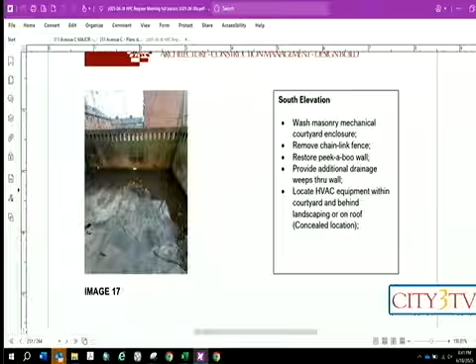Wash masonry mechanical courtyard enclosure. Provide additional drainage weeps through wall. Locate HVAC equipment within courtyard and behind landscaping or on roof in a concealed location.

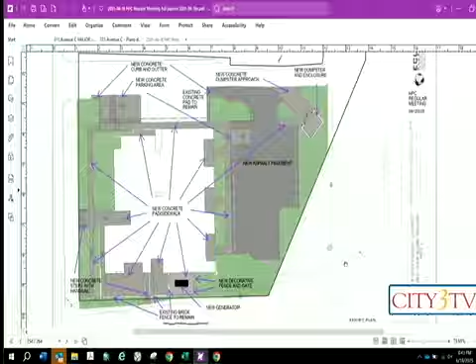Let's see, what's that? So here's a colorized elevation of the front. Here's the board and batten - instead of horizontal siding, it's board and batten here. And the roofing is the new asphalt shingles.

This is the existing brick wall. So none of that's really changed except for one of the windows has been filled in, and the board and batten.

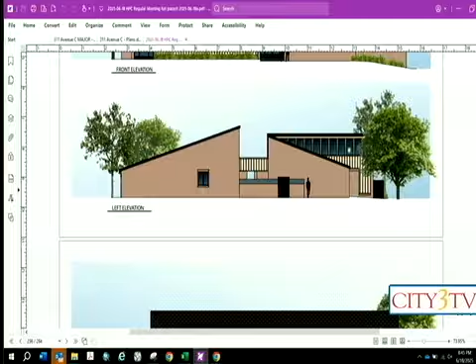Then on the left elevation, so the front is out to the right. There's a new gate to be added, that chain link fencing is removed, and that's pretty much it. You can see some of the board and batten on the tall part of the building behind here with all of its clerestory, essentially windows up there.

Then the rear elevation is relatively unchanged except for the plantings here, and that one window that is to be blocked out. Are you using spandrel glass now?

Are you using spandrel glass now for closing up that window on the back? We were planning on using the same material as the siding, the board and batten, to cover up that small area.

So that doesn't show here, but one of these panels will look like board and batten? Yeah, the one to the left. Oh, this one over here? Yeah, sorry, we just haven't changed it there because we're figuring out the exact size we need with the structural.

Okay, and on the left here, this is the rendering of the ornamental fencing that you can't see at the scale. There we go, it's more than just a black wall. And this kind of demonstrates the size of the generator itself.

Looking over that. Oh no, what did I do? There we go, sorry. What else is on here? That's it.

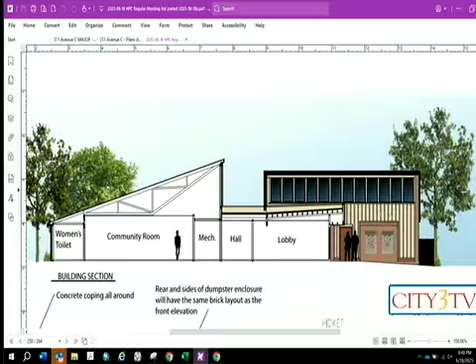Here's a sketch of the trash enclosure. It's entirely surrounded by brick on four sides with a gate on the front also, and the brick wall is capped by concrete. Then these are the sketches of the side of the fence indicating the 3-inch maximum spacing between the vertical pieces, and a detail of the stairway and handrail.